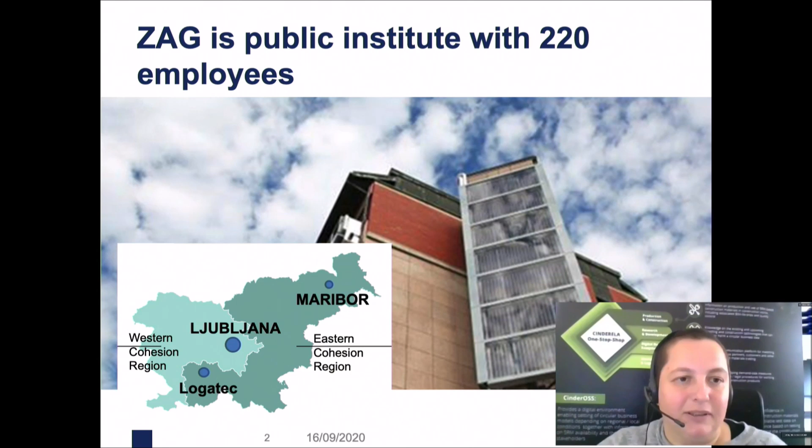So it is our main topic about the construction sector, and of course here we know that the construction sector is really consuming a lot of the raw materials. So it's about half of all raw materials entered in the construction sector. When I'm saying construction sector, it's not just building, but also road construction and infrastructure, etc. And also one third of the water. So making the construction sector a circular one really means that we are making the circular society.

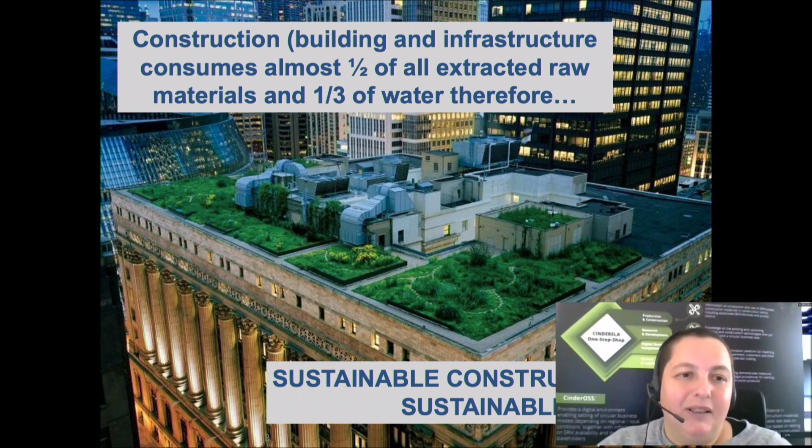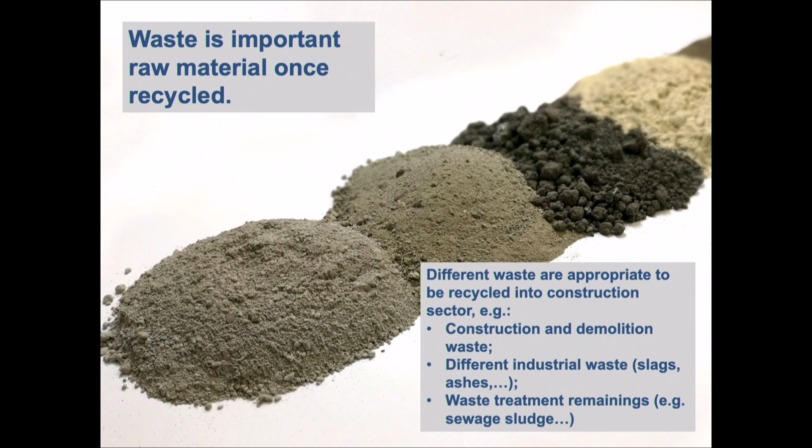Next slide, please. So waste here is an excellent raw material to be recycled and which can be used. A lot of, I would say, many types of waste can be used in the construction sector. So these are not just the waste which is produced inside the sector itself, so construction and demolition waste in the means of the excavated soil or the old brick or old concrete, but also there are excellent raw materials inside the waste in other sectors.

So, for example, in the group of the industrial waste, so typical slags or ashes, or even in the municipal solid waste. So, for example, in CINDERELA we were looking for two big flows inside the municipal solid waste, and one is the sewage sludge, which is the end product of wastewater treatment. And the other was, for example, also the material which comes from municipal solid waste treatment, so the real remainings which usually cannot be used anywhere else.

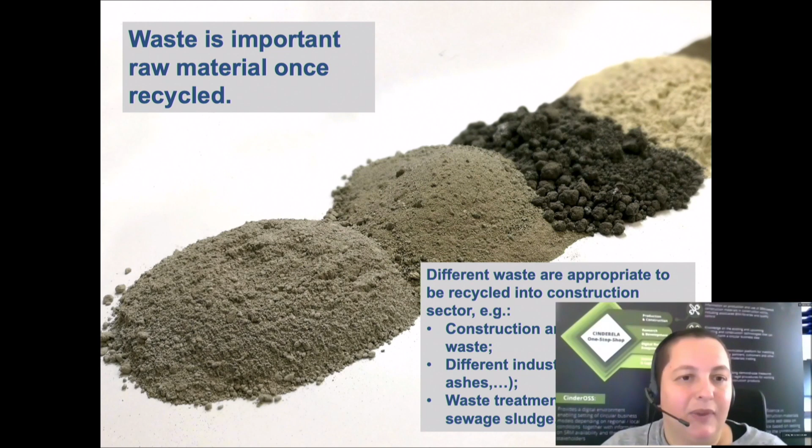So next slide, please. Just with this picture, I would like to remind you how the picture looked before China ceased import of the plastic. So this is really the global mass flow. Most of our plastic waste from Europe, from America, from other parts of the world went to China. So this is what happens if such one waste flow ceases. Suddenly we had in Europe a lot of municipal waste which we didn't know how to treat.

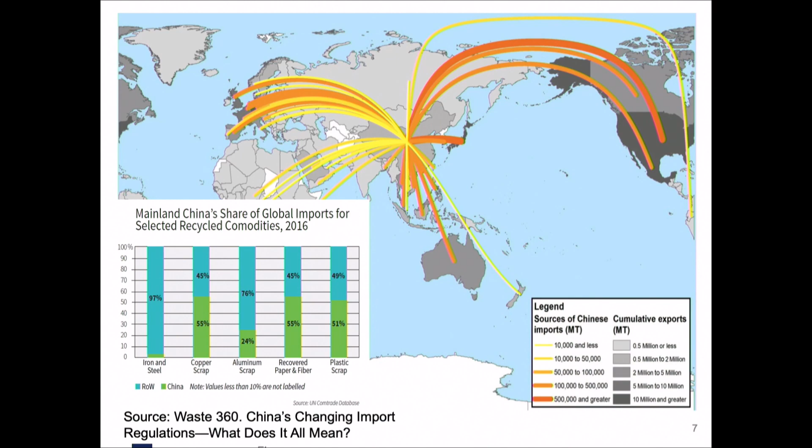So next slide, please. And this waste, this example, can be one of the key drivers for development of business cases, circular business cases for construction inside individual regions or municipalities. So these are linked, like we know the butterfly effect, which on one part of the world can affect what is happening on the other part of the world.

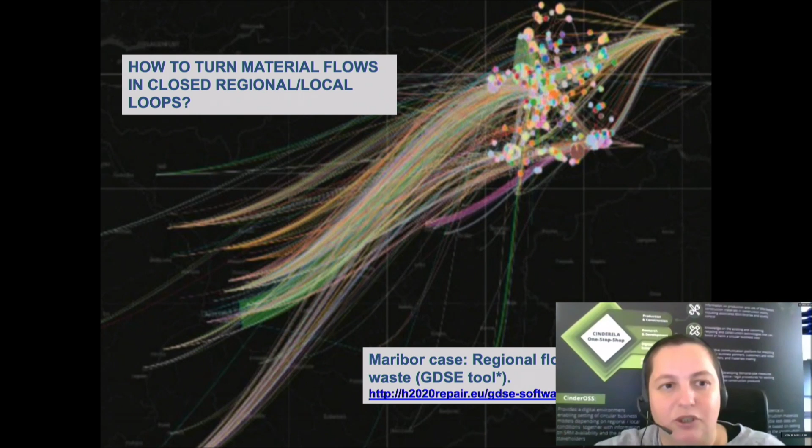And now I am showing a different view. What is happening? This is a case from one of the 6 cases in CINDERELA, when we made the mass flow analysis with support of the GDSE tool. So this is Maribor city with the neighboring cities, so it's kind of the Maribor region, and on this micro level we still have currently, based on our study, a lot of flows which go out of the city. So everything that happens inside the city and in other city centers goes mostly out of the cities, and mostly we have to know that these are collectors in other cities. So from this small picture we can see how linear economy works, compared to the large picture which we saw before. Next slide, please.

And inside this work package 3, which is now concluded, we also made assessments beside these mass flows and assessment with the GDSE tool. We made the assessment of different value chains and different waste, technical properties of waste which can be used, but also the general framework of the study - what are the key drivers and which are the barriers currently to turn the linear construction sector into a circular one. One of the things which is very important is the current legislation.

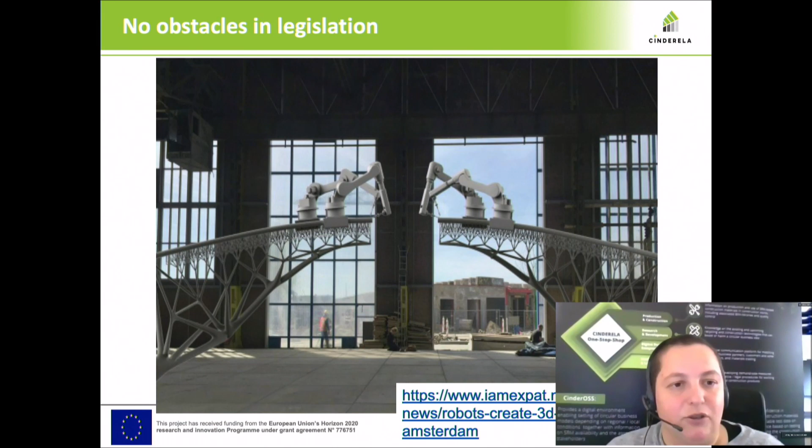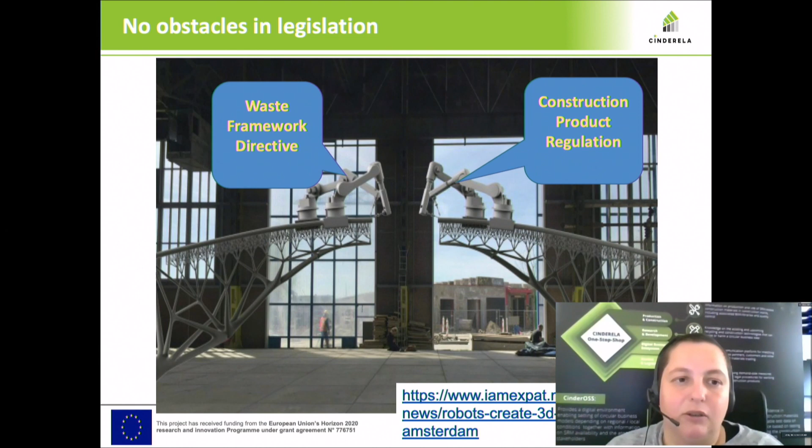So, next slide please. Generally, when we are talking about secondary raw materials in construction, we are dealing with waste legislation, which is usually national, based on common European legislation, and we are also talking about construction legislation, which we have in the field of construction products. We have the European common legislation.

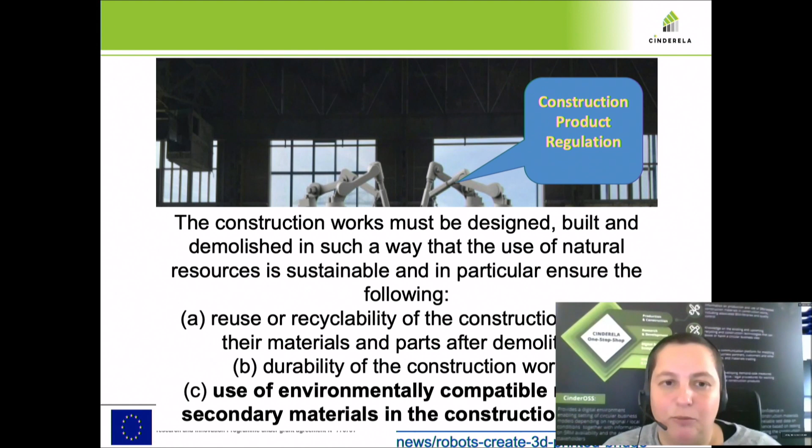Next slide please. So in this Construction Product Regulation, CPR, which came in 2011, what's new is what you can read here. The construction product regulation is already enabling secondary raw materials to be used in construction, and this is really a big benefit, because in our institute, when we work on how to put products on the market, it's very important to have legislation which enables use of secondary raw materials - of course, if they have appropriate properties according to the intended end use, and they fulfill all basic requirements, including health and environment, for their use.

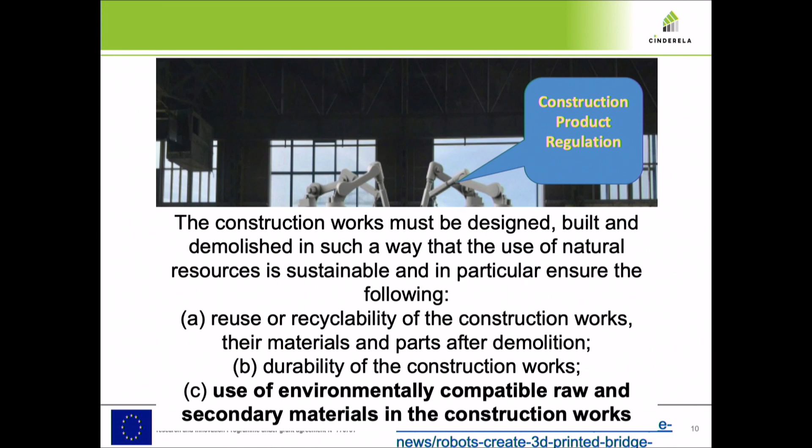Next slide please. In the part of digitalization, of course, in the construction sector, Building Information Modeling is very important. It also supports using secondary raw materials, enables bigger transparency, and enables us to follow the whole material - from the waste to the recycling to the use in production into the construction product, and also where it's built and how to reuse it later when it becomes waste again.

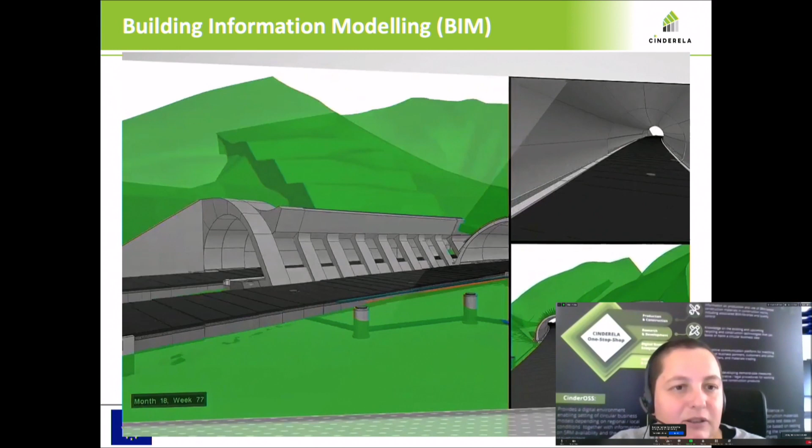Next slide please. And this part is also very important for the construction sector - we don't just recycle materials, but we also reuse, so the so-called modular construction is very important, as well as new technology such as 3D printing. Next slide please.

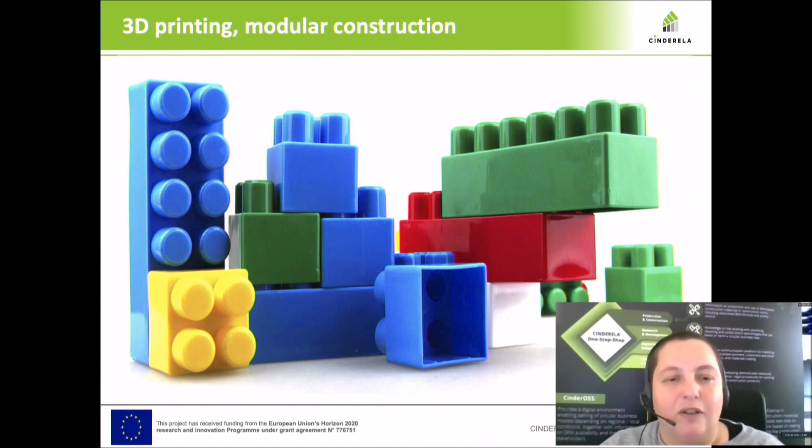And now I come to our large-scale demonstrations. The first is really a smaller one, but it's very important because it illustrates the example that we don't recycle just from the waste directly to the final consumer, the construction sector, but that we make a kind of sequential recycling. So I'll take one example which we built on - the use of sewage sludge in the construction sector. This is possible, but sewage sludge also contains a lot of phosphorus, which we know is a critical raw material.

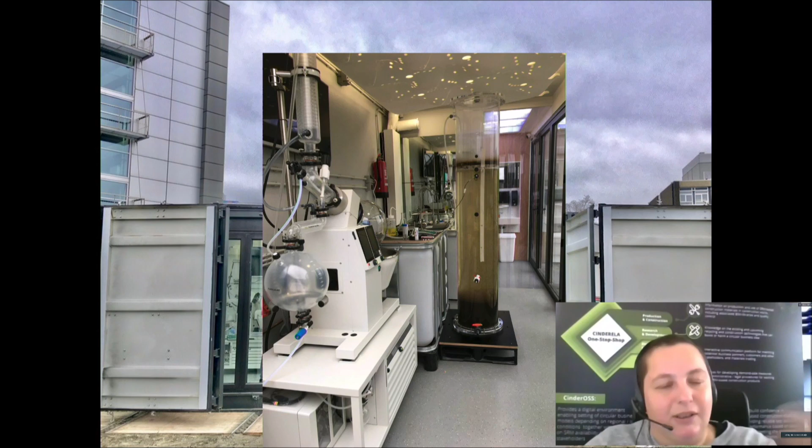So this is the laboratory part of our small demonstration of recycling urine with the extraction of nutrients.

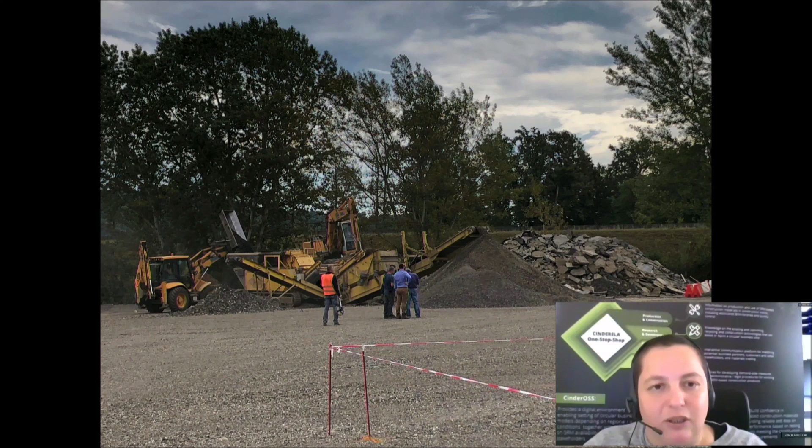Next slide please. The other thing you can see here is a relatively simple recycling of construction and demolition waste, you would say. But this is one of our large-scale demonstrations, where we are in Maribor city in Slovenia, building three types of construction works where secondary raw materials will be used.

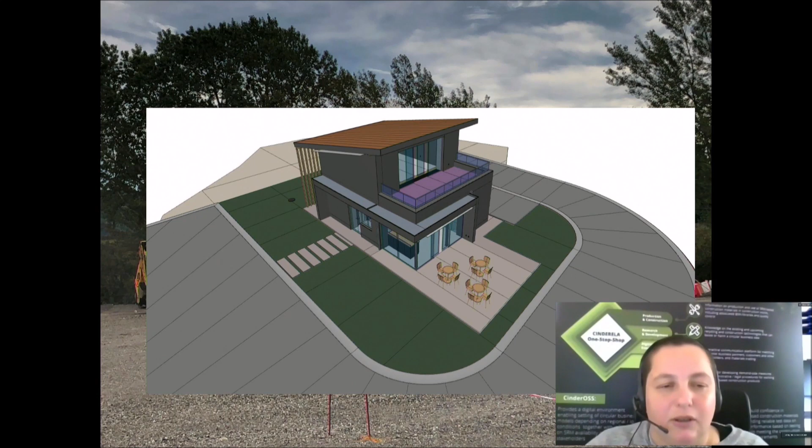Next slide please. So this is the building which will be done here, also made together in BIM, Building Information Modeling, together with the revitalization of the degraded area, because it stands on a degraded area, and also the road construction. Next slide please.

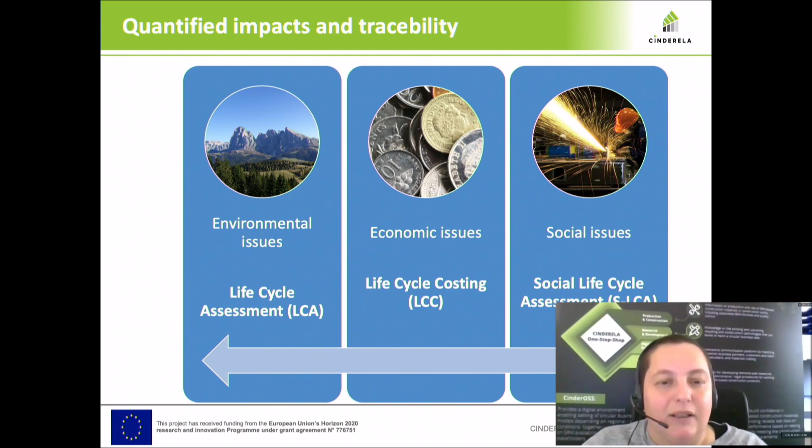And the last, very important, is also quantification of the environmental impacts of secondary raw materials. So in CINDERELA we are using the usual life cycle assessment. And the final slide please.

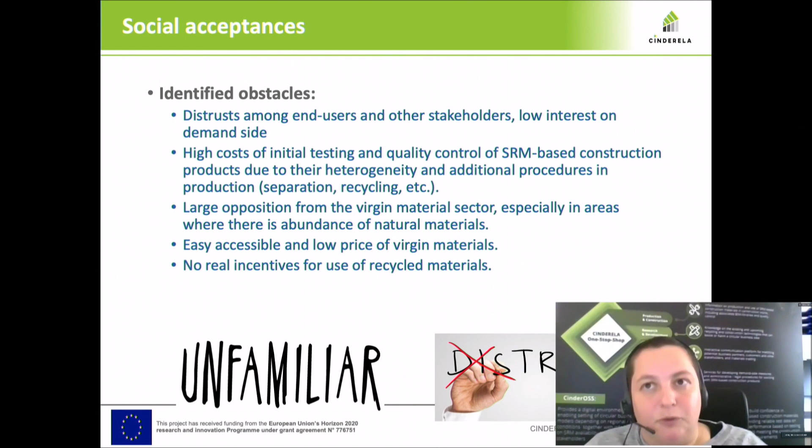So this is very important, we find, especially in the parts, like I said, where there's a lot of primary raw materials - awareness is really rising regarding the use of secondary raw materials. But one important element is to turn the distrust of secondary raw materials, still considered somewhere as waste, into trust for them as secondary raw materials. Thank you very much.